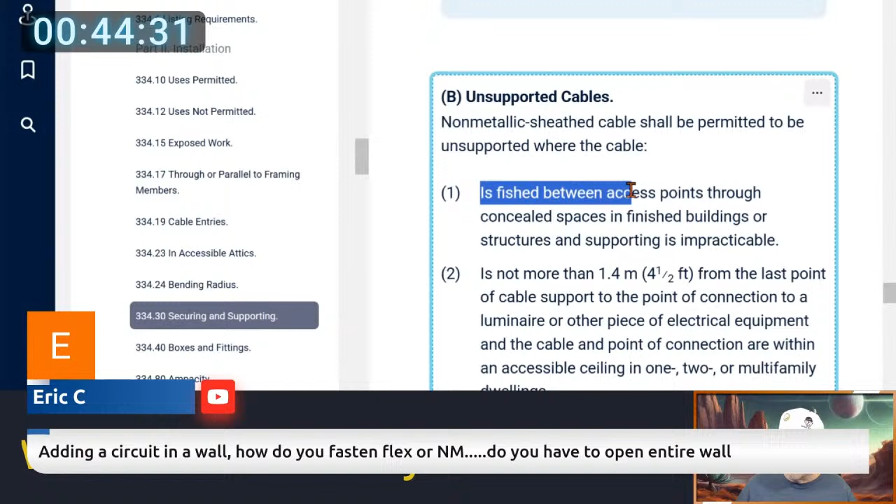Okay. So let's go in. So that's going to be under your 334.30, right? So it's the securing and supporting. So you've got all these rules. Then you've got this rule down here for unsupported cables. Here it says non-metallic sheathed cables shall be permitted to be unsupported where the cable is fished between access points through concealed spaces in finished buildings, not new buildings. Finished buildings. So you're coming back and adding a receptacle.

Let's say an example was you have one down low and you want to add it up high for a flat screen TV. Well, they make kits for that. You're not going to put cords in the wall. You're going to use cables. And this is a good example. And impracticable means it's not something that we're going to say, go ahead and rip the sheetrock open. That'd be pointless. That type of thing.

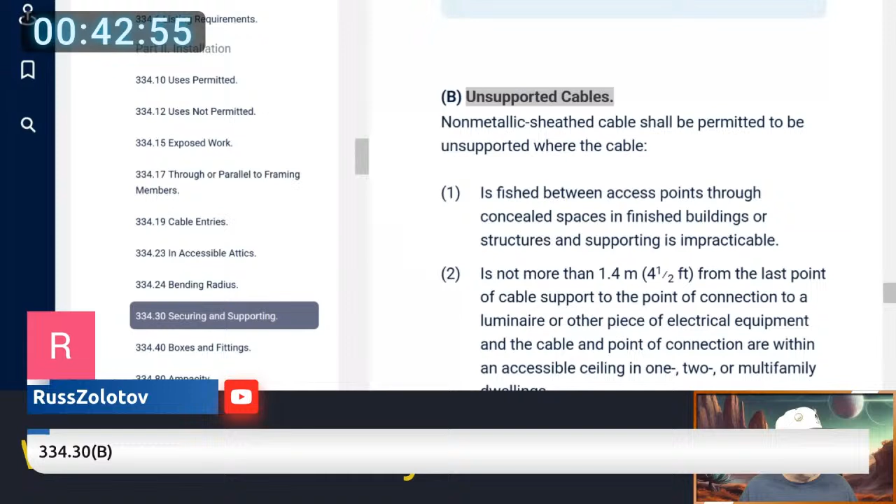Yeah, Anthony talks about IAEI crumbling. Yes, I believe you're right as well. And I think the first mistake they made was getting in bed with manufacturers like Eaton and the people that maybe work for Eaton. I think that was the first sign of crumble, which means that they have nothing in their own association to create things, so they have to pull from a source that probably didn't charge them anything. Anyway, there's a whole bunch of things wrong with IAEI. Now, do I still support their effort? Absolutely. But as an organization, in my opinion, I dropped my membership because I just don't see it. I'd rather support NFPA, even. So anyway, let's see here.

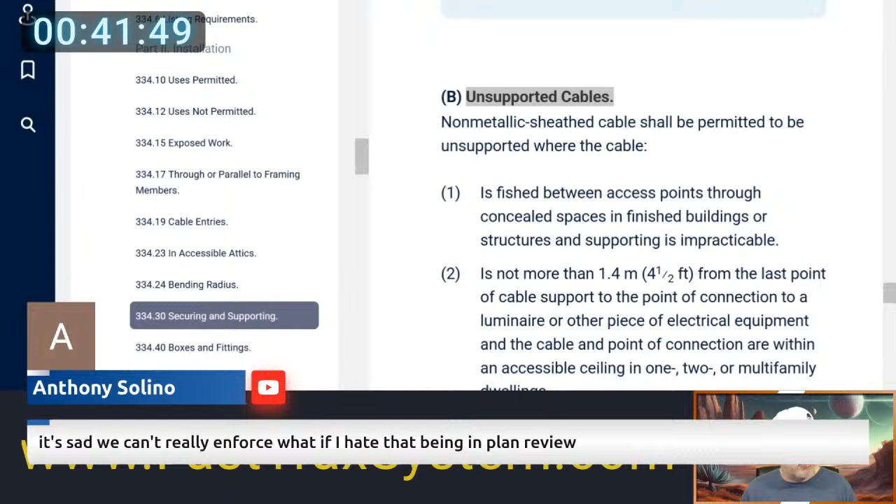So Anthony says it's sad we can't really enforce it. So in plan review, you're looking at it and they don't have to put a receptacle there. Okay. So let's go back real quick and look at the code, and then we'll break it down and I'll show you what the code says and how it changed, for those that are like, all right, how does this actually change?

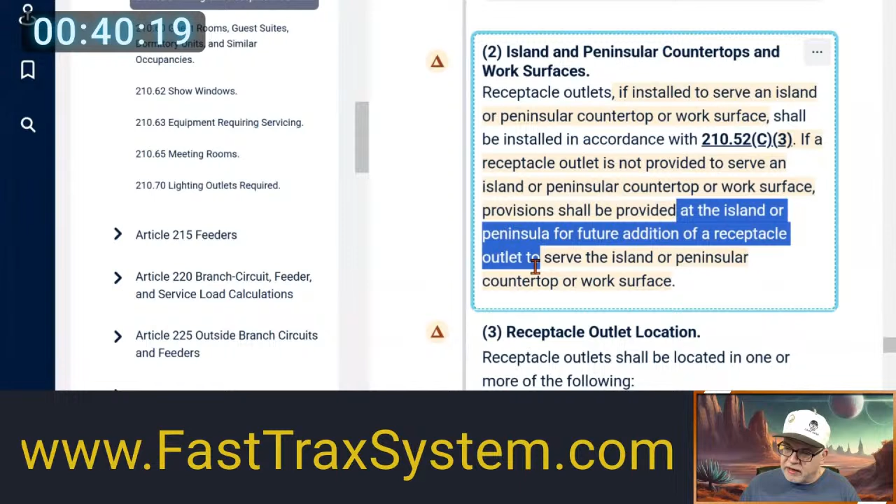So what it's saying is, look, if you don't put one, then you have to provide provisions there to do it, okay? If you do put one, then you have to follow the location rules, right? That's basically what it's saying. Now, when it talks about having a provision there, that could be you putting a junction box underneath there. That could be you putting a raceway from a location where you can get to the circuits, running the raceway over and a raceway up. That could be considered being able to add it in the future.

I would argue also that if you have an island and it's unfinished underneath it, or a crawl space and you could get access to it, you could get underneath and up into it, that could meet that provision. That is something you'll have to talk about with your AHJ to make a decision, okay? So that's something that y'all have to work out with your AHJ to see what they're okay with as far as having that future provision there. Now, as far as the location, let's say you are putting one, right? You choose to put one, okay?

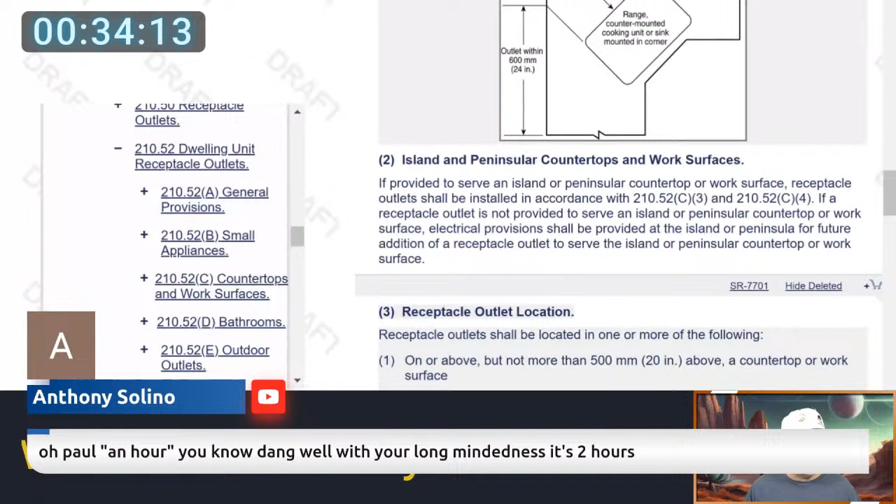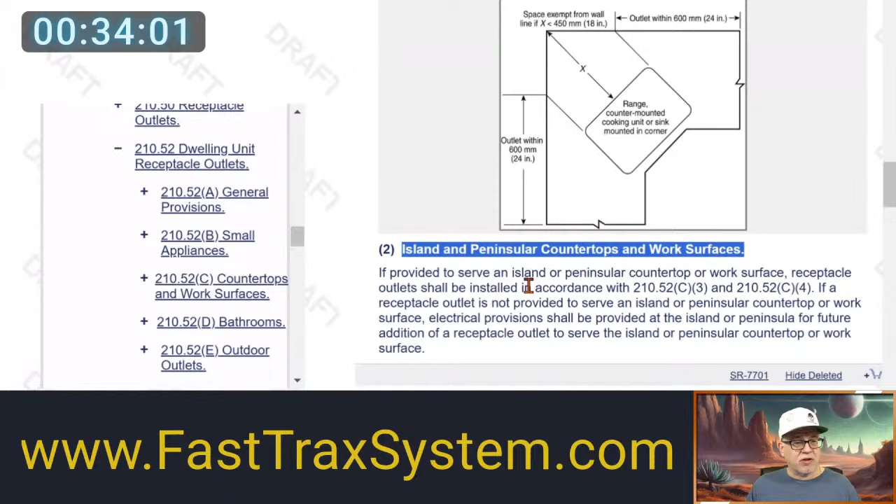All right, so that is the code requirement for the 2023 National Electrical Code. So the next thing that people look at is, okay, well, what's coming for the 2026? Is there going to be anything that helps this, anything that gives a little relaxation? Okay, so here is what is proposed for the 2026 currently. It says if provided to serve the island or peninsula, all this looks the same. Doesn't look like any key difference here.

Now let's look at the locations. It says receptacle outlet locations shall be located in one or more of the following: on or above, but not more than 20 inches above. Okay, that didn't change. In a countertop using receptacle outlet assemblies listed for use in countertops. In a work surface. Okay, that doesn't look like that has changed any. I'm just trying to see if anything enhanced anything. Okay, so that is the locations.

Now it seems to add something called receptacle outlet locations prohibited. Let me get rid of this deletion here; this is a little cleaner language. It says required and permitted receptacle outlets installed in a location that is accessible outside a cabinet or wall surfaces that are below the countertop or work surface shall comply with the following. Okay, so this right here seems to give the receptacle.

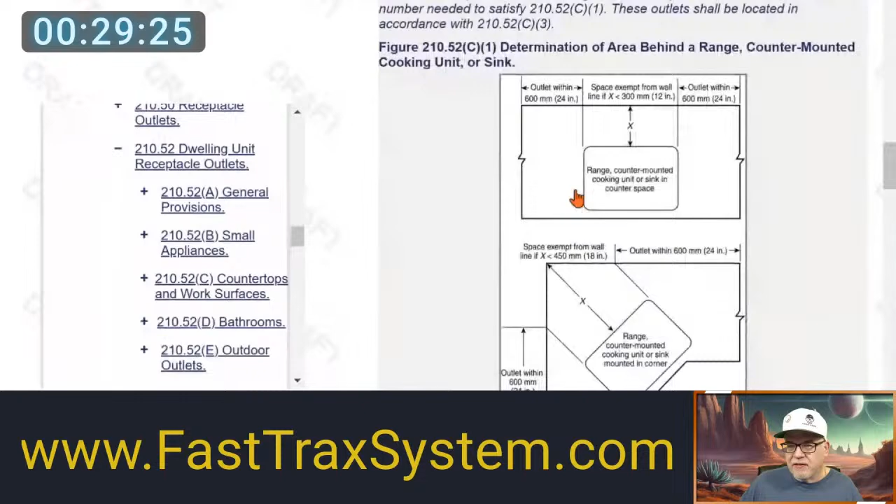Let's see here. I don't know if I can go back to the first draft report. Hold on. Let me go back real quick. I want to look at something in the first draft. Bear with me, guys. This is when it first got submitted. This is for 2026, for people coming in saying, what the hell is he talking about? I'm just trying to see if there was any language change.

And okay, so here, so then we have the locations that you can install it, right? And then it went on to say outlet locations prohibited. Okay, shall not be installed on cabinet. This is a very stupid structure. Somebody that submits a NITMAM for this has to clean this up. This is very stupid code language.

You start off by saying where the receptacle outlet can be, right? And you give all this information, and then you're going to give receptacle outlet locations prohibited. And then it's going to tell you that required and permitted receptacle outlets shall not be installed on cabinet sides or wall surfaces. Okay, but this is the locations where you can put it. And you have nothing in here that says that it can be on the side, right? Or below. Then you come down here and say, oh, well, you have locations that are prohibited.

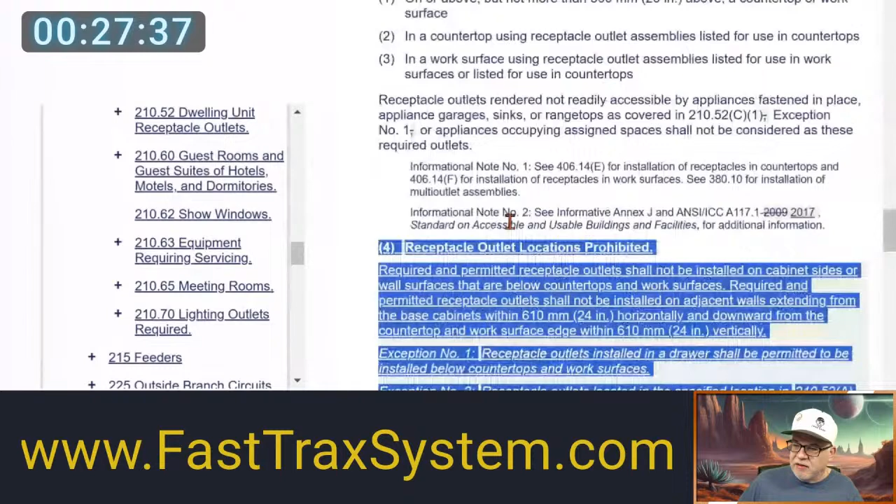It says required or permitted receptacle outlets shall not be installed on. So this is general, okay? Looks like this is just general to countertop spaces. It just looks like it has nothing to do with the island or peninsula. This one is referenced down here, and then this is also referenced. It's very stupid language. I'll have to look at it. I got to come up with a NITMAM, since this is really poor language.

Okay, so. That was what I was afraid of. I was afraid that I would go look at it, and I'm going to have to look at it deeper. I was afraid I'd go look at 2026 and really get discouraged in what the code panel's doing there, because it is. I don't like it. I don't like you tell me where I can put a receptacle outlet on or above, and then you have prohibited areas, and then you proceed to tell me what's prohibited, which is general. In a kitchen, let's say, because it looks very general.

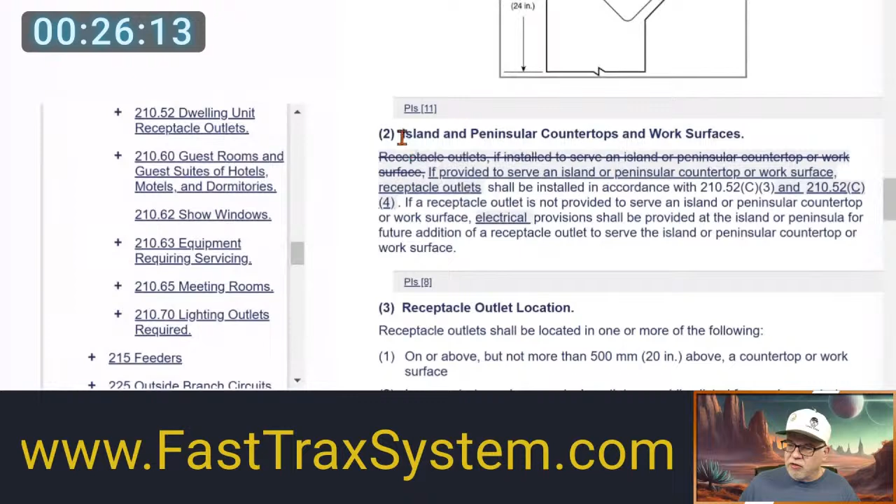And why I say it's general, by the way, let me take you back here real quick. Let me tell you why I say it's general. Because you have this requirement, which is subdivision 2, and then 3, and then 4. This is 2026, by the way. We're just looking at 2026 proposed. You have this wording here, and it makes reference here, and it says, shall be installed in accordance with this and this, okay? So this tells you where it has to be.

And this is telling you where it says required and permitted receptacle outlets shall not be installed on the cabinet sides or wall surfaces that are below countertops and work surfaces. Required and permitted receptacle outlets shall not be installed on adjacent walls, yada, yada, yada. Then it has an exception down here that gives no guidelines, for example, to not being below 12 inches, overhangs. So that tells me that it is not particularly germane to any of this. So it's just very muddy wording.

And so somebody can argue and say, but is this saying that I can put it on a drawer below the countertop? Okay, which here it says that the receptacle outlet location has to be where? On or above. Okay. And they're saying, well, down here, they're talking about prohibited locations. And it says the required and permitted receptacles shall not be installed on the cabinet sides, yada, yada, yada. And then proceeds to give me an exception that says receptacle outlets installed in a drawer shall be permitted to be installed below the countertop surfaces. But that's in the drawer.

Okay, so if I cut it into the face of the drawer, then it's allowing me to take a drawer and sacrifice it to cut a receptacle outlet in there, and then that would be permitted. Doesn't say anything about that drawer has to be fixed. It could be open. So if I have cables running through it, you're going to have this cable exposed in a drawer. It doesn't say that the drawer has to be fixed in place. It's just muddy as hell. I don't get it. The code panel 2 did no service there. Okay. Wow, that one is muddy as hell.

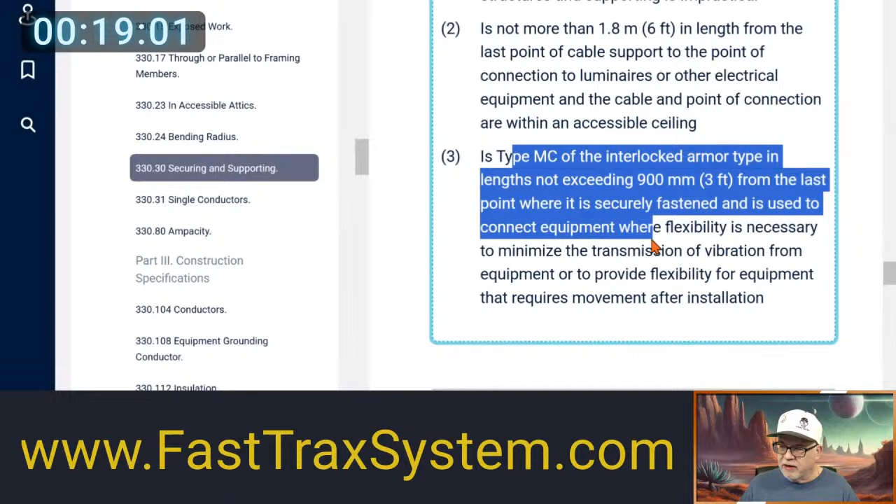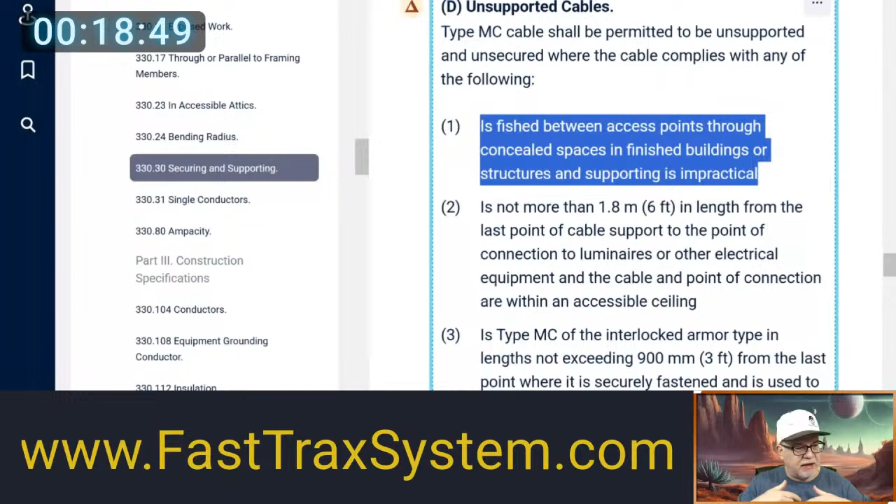So this is only in a situation, not in an open ceiling, not in an accessible ceiling. This is, again, where you might cut the finished wall and you fish something down to get from point A to point B. I don't see a distance length on it. I don't see anything in the code that demands distance length. That answers your question.

Russ with another one says, okay, I think this is tied to the other one. For example, 625 requires the EV charger to have 125% rating on the circuit, but 240.4 allows for the use. Yeah, it does allow for you to use the next size up, but that's for the overcurrent protection, right? You still cannot load a conductor more than its ampacity rating.

So we get a lot of rules where it tells us to go up to 125%, right? And even though you're in 625, it has its own rules, you still have other rules you have to follow. You still have rules in 210 you got to follow as the branch circuit. So I could have a conductor and I size it to 125%, and then I'm going to put it on an overcurrent protective device, unless something prohibits it in 625.41, which we can go look at.

If a conductor's good for, let's say, 18 amps, and you terminate it on a 20 amp overcurrent device, as long as the calculated load doesn't exceed the rating of the conductor, then essentially you're still protecting that conductor, okay? It's still fine, and that's the whole principle behind that. So we do that all the time.

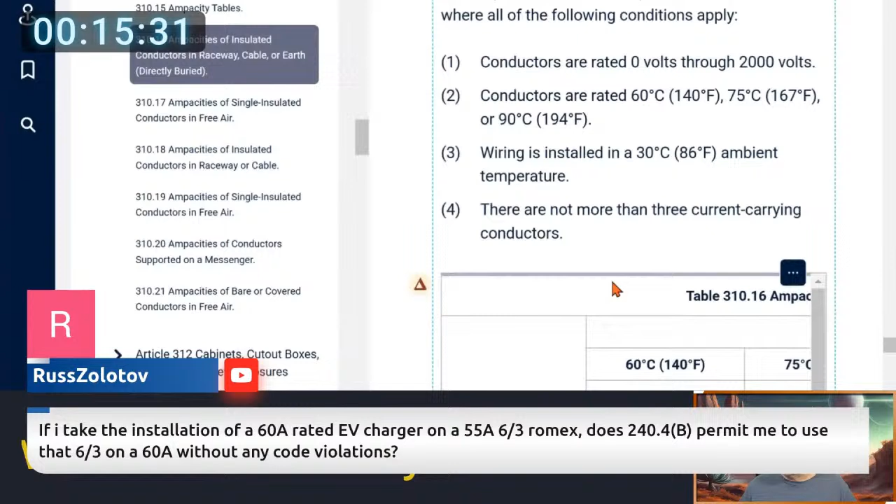So if we go to the NEC, here's the ampacity. I'll pop this table up. We can see the majority of it. We'll be over here, okay? And I'll pin this header. All right, so a 6 gauge is good for 55 amps, okay? So in that scenario, you're limited to 60, okay?

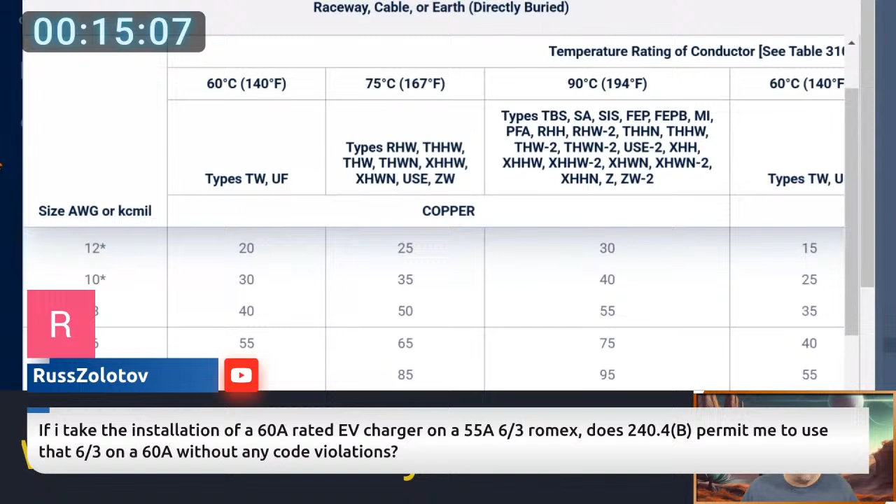So one of the problems we do for the adjustment and corrective purposes, and I got to get rid of this because it's in my face, there's an example where you can't exceed the ampacity of the conductor, right? And so in a scenario where, if the load is going to be less, then you could terminate it, although 334.80 tells us that you can never exceed the rating of the conductor to be protected. So you typically would not use a next size up rule for that.

But I'm trying to think of an example that I see. Let's see. I think the example I see is typically those EV chargers, level 2, are like 48 amps, right? That type of scenario. And also remind you that the other thing that comes into play is typically 240.4(B)(1) does not allow the next size up to be used on receptacle circuits, right? So this is an EV charger. Okay, you might say, okay, well, it's a single receptacle.

Well, one of the things that you're bound by is the manufacturer's instructions, what they tell you you have to do, right? But if we look at the scenario, you're painting a scenario that doesn't really exist, because what you typically have is a 48 amp level 2. It's an industry standard 48 amps. So you're doing a bait type question, Russ.

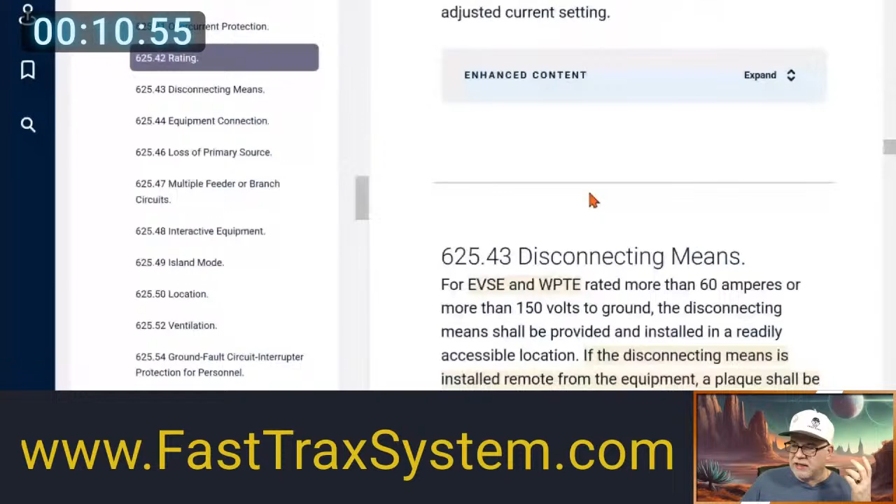So the overcurrent protection, and I think that's what your situation was, Russ, with your 60 amp EV, is typically 48 times 1.25, and that's where the 60 is. So you have the 60. Okay, now getting down into the rating. The EVSE shall have sufficient rating to supply the load served. And if you go down through all of these, unless you're going to be limiting the load, you're basing the circuit on the overcurrent protection, and we have to protect the conductor at its ampacity, right? Well, we're told what?

For example, if you look at the example up here for the EV branch circuit, it says each outlet installed for the purpose of supplying EVSE greater than 16 amperes shall be supplied by an individual branch circuit. All right. And as you can see now, we have to do the overcurrent protective device at what?

125% of the rating, which is why we got to the 60. Okay. All right. So we typically take these EVs as a continuous load, right? So we're going to take whatever it is at 48, and the manufacturer tells you this too. Take that at 125%, and that means that I have to have a conductor that's good for what? 60 amps, because I took it at 125%.

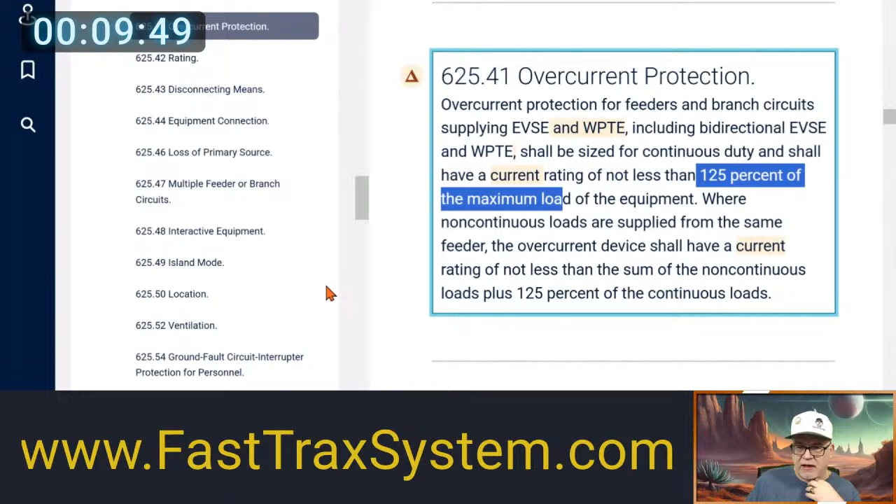Well, that's why you can't use the NM cable at the rating you were looking at. If we go back to conductor sizes, this is why, and I'll pull this up here. This is why we can't use, in this scenario, 6. Now, can we use it if everything is rated for what? Okay, now, do we have any adjustment or corrections to take place? If you have some adjustment and corrections to take place, remember that 60, even at the 60, is still 55 amps, which is the actual load.

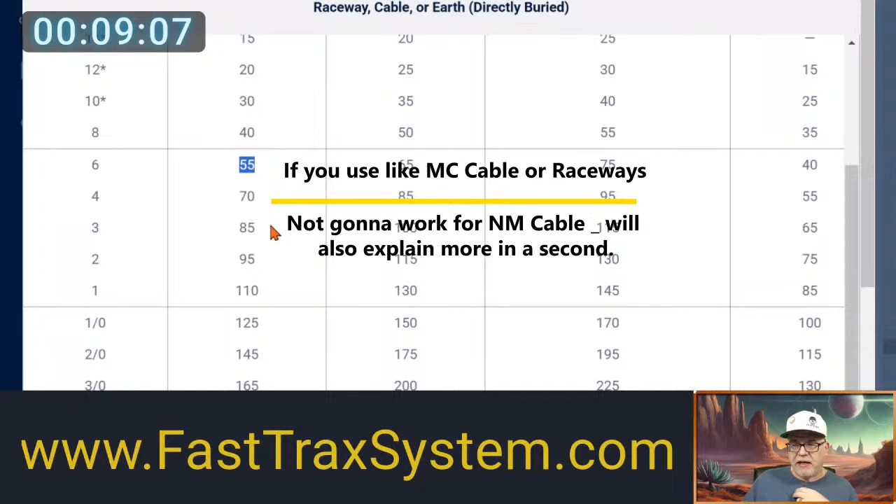So is it a possibility if you have any adjustment or corrections that have to take place, then you would be adjusting from the 90, right? And as long as the actual load doesn't exceed that of the 60, then you can get away with the 6 gauge. Does that make sense? So if you look at 334 and you have to do some adjustment or correction purposes, and I'll assume that in your case you are.

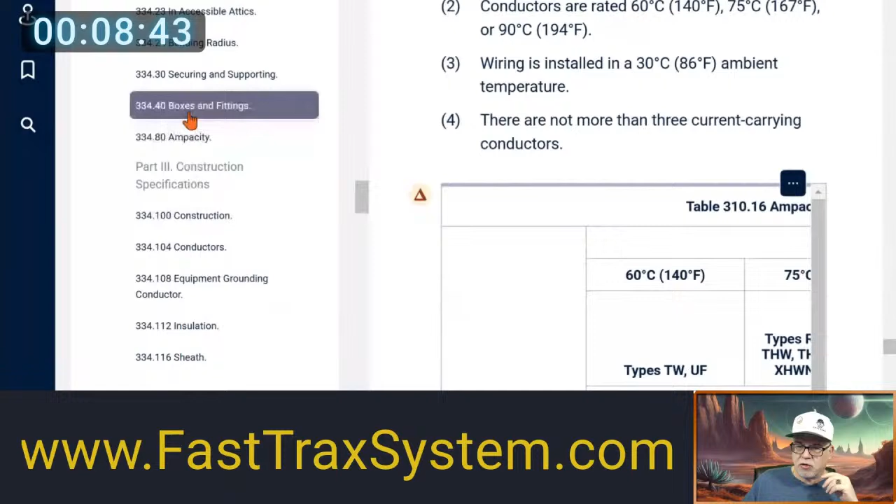And if you look right here, it says, okay, the ampacity of NM cable shall be determined in accordance with 310.14. The ampacity shall not exceed that of the 60 rating, okay? The 90-degree rating shall be permitted to be used for adjustment and corrections, provided that the final calculated ampacity does not exceed that of the 60. So that's not really using the next size up rule. That's just using the allowances here.

So in this case, are you making an adjustment or correction? Because the actual load is 48 amps. But if you do it at 125% for continuous load, then that's going to put you up into the 60. And of course, in that case, we're just using NM, and there's probably not going to be any adjustment or correction to take place. So you're going to end up protecting that conductor at the ampacity that you calculate when you're sizing it, at 125%. So that's where you size your conductor. And then, of course, that's going to be okay because it's going to be on a 60.

But the irony is, if you do have some adjustment and corrections that take place, then you might be able to play around with it and see what you can do. I don't know if that answers your question, Russ, but again, most people run into this question with the non-metallic sheath cable. And the biggest one that I get from these folks is they want to run, let's get back to the ampacity real quick. They want to run this. Or they want to run an 8-3. And the problem with the 8-3 is because of this, okay?

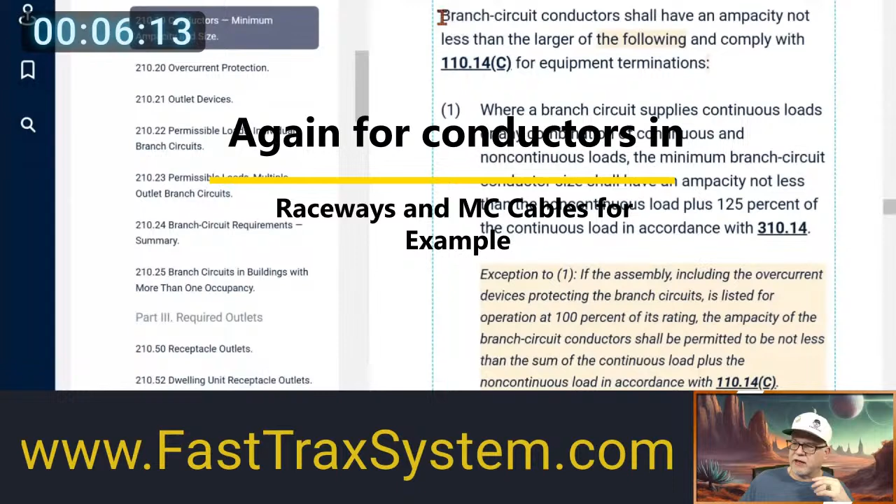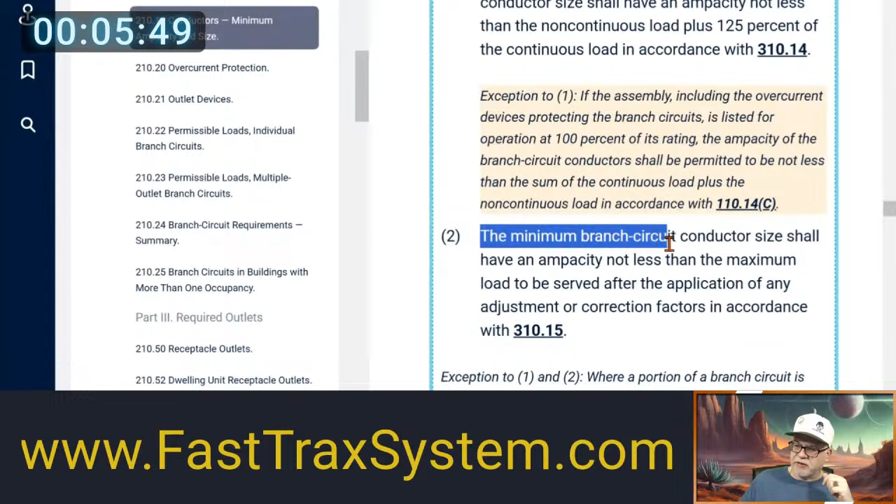So here's the rules that we were talking about for branch circuit, because that is a branch circuit. It says where the branch circuit supplies continuous loads or any combination of continuous and non-continuous loads, the minimum branch circuit conductor size shall have an ampacity not less than the non-continuous load plus 125% of the continuous load. Okay. And then, of course, the minimum size branch circuit conductor shall have an ampacity not less than the maximum load to be served after the application of any adjustment or correction. So you could have a situation where you have an adjustment or correction that takes place, and then you only have to size the conductor what?

It's based on the actual load, which is continuous load, but it's the actual load. Like the 48 amps is the actual continuous load. We're just following the rules and sizing it at 125% and then picking a conductor. And then also in 210.20, it's the same scenario for the overcurrent device, right? Same scenario, continuous and non-continuous loads.

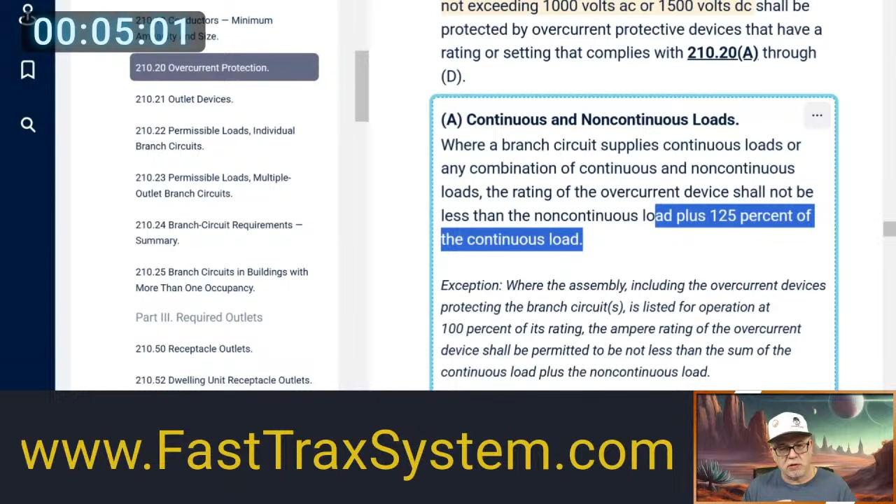So if the manufacturer already dictates that it's to be treated as a continuous load, then you do it. The question is, is that a continuous load or not? And that becomes the question, and this is the 2023, by the way: is that a continuous load? Is it going to be pulling its maximum output for 3 hours or more? Or does the NEC tell you to treat that as a continuous load? So that's the type of scenario you want.

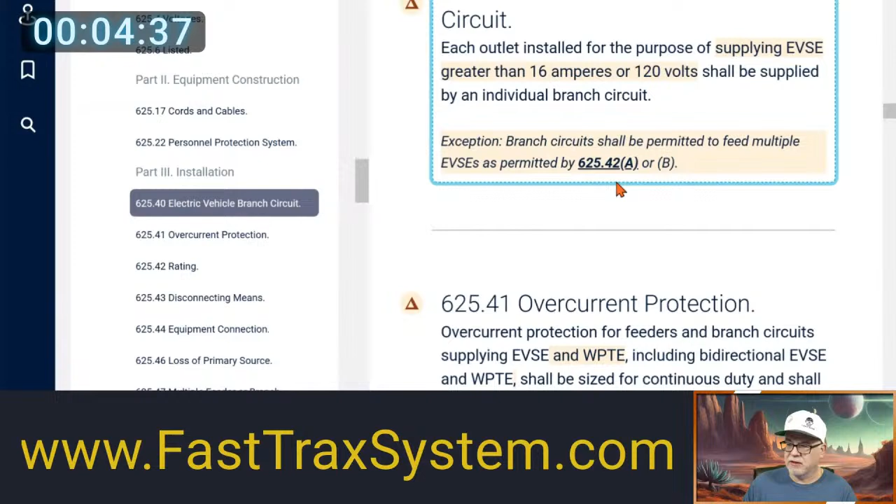And if you read down here, it's telling you the overcurrent device for feeders and branch circuits shall be sized for continuous duty and shall have a current rating not less than 125% of the maximum load to be served. So at the end of the day, that's typically why a manufacturer will dictate the sizes. Does that make sense? Just picking on you, Russ.

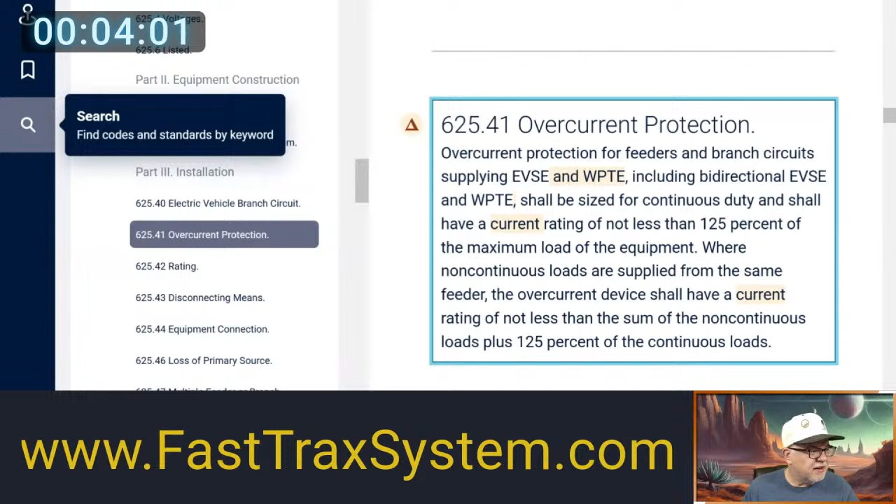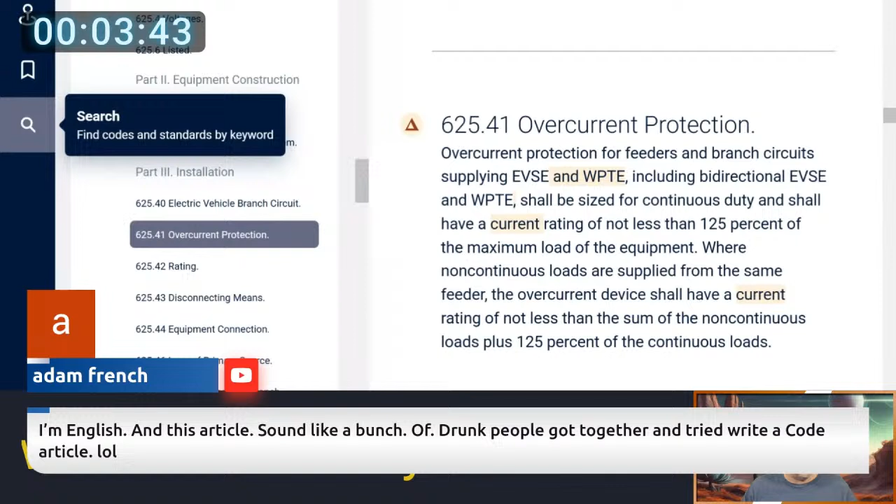What else we got here? Let's see. Adam says, I'm English, and this article sounds like a bunch of drunk people. Are you talking about the 625? Or you're probably talking about the receptacle for the island. Yeah, it is a bit gibberish.

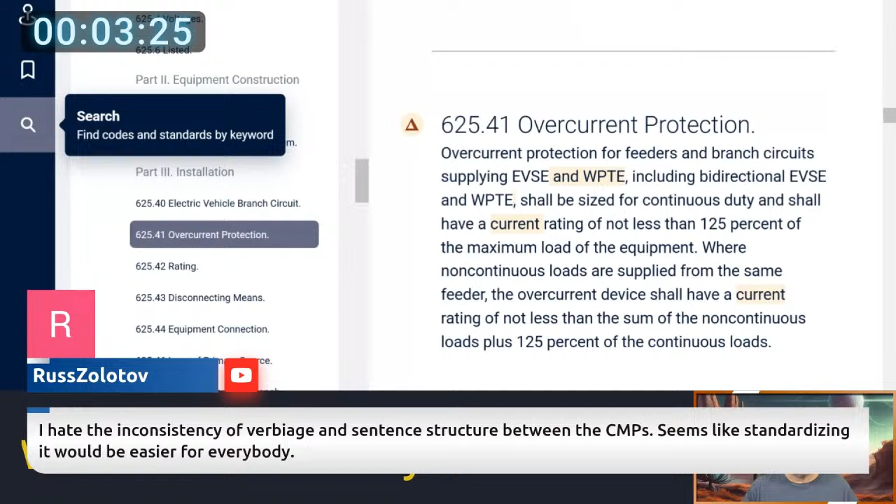Russ says, I hate inconsistency in verbiage and sentence structure between CMPs. Yeah, it kind of changes. The only thing I can say is that you can submit public inputs and public comments to try to get things changed. I will tell you that in the 2029, they're not going to change the code language, but the structure is supposed to be a little bit better.

Hold on a second. Let me type this in here for you. There we go. I was trying to see if I had something I could bring up that might have explained something a little more. I had a really good article I was going to share in the chat, but I can't find it.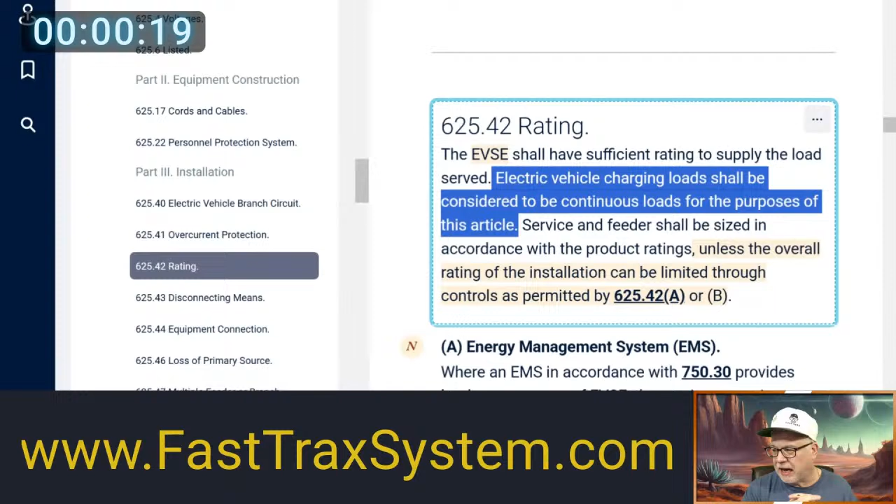But that's what causes the problem: we're forced to size these circuits as continuous loads. So in your case, Russ, the NM is good for 55 amps, but we're required to take that 48 amps that is the continuous load, probably on the nameplate, at 125%, and that's 60. So I need a conductor good for 60, terminated on a 60 amp overcurrent device. The problem everybody falls into with this NM, and I'm okay with people running NM, we make NM.

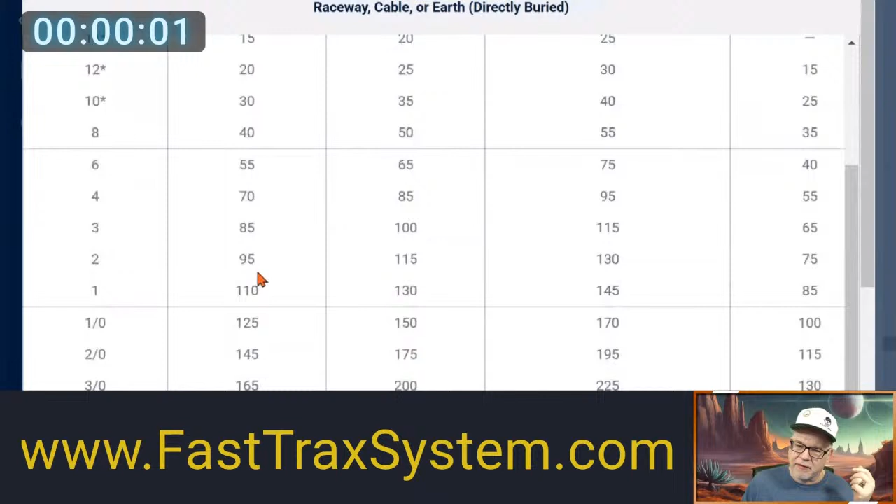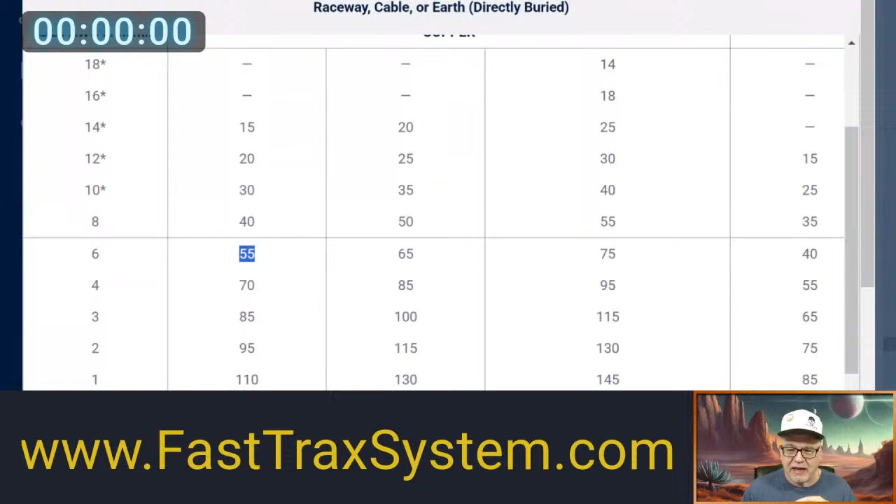I think the problem is when they go to the ampacity tables, like here, they get pigeonholed into the fact that this conductor is only good for 55 amps under the 60. And I was told to treat it as a continuous load. If it's 48 amps, I do 48 times 125%, so I need a conductor that's good for 60 amps. And this is where they get screwed. They want to use this column. I get it.

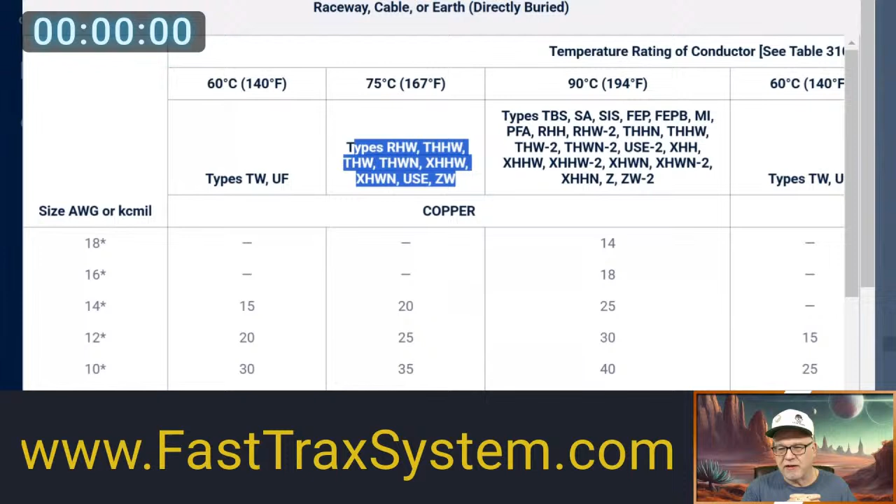But at the end of the day, you can't, because 334.80 is going to tell you that you can't exceed the values of the 60, even though you can do an adjustment and correction. And we can play with all those numbers at the end of the day. But it typically is protecting a conductor at its ampacity.

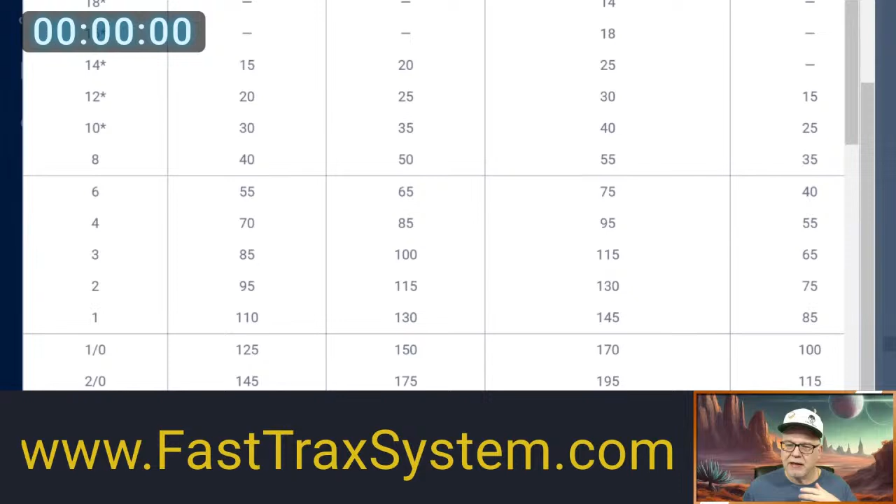Now, the argument is, okay, you say it's 55 amps, right? That's what the conductor's rated for. If you did the load calculation and the amps you need doesn't correspond, then you're able to go to the next standard size, right? Well, this one is rated for 55 amps. And if I go look at, I love these discussions. If I go to look at

If I do an adjustment to a conductor's ampacity and it comes back at 56 amps now, well, there isn't a breaker rated for 56 amps. So then I'm able to go to the next standard size overcurrent protective device. It's not like I can say, oh, let me go to 55, and then I can protect it at 60 in that scenario. Basically, when we use that rule, we've done a calculation and it doesn't correspond, right?

So in our case, there is a 60 amp overcurrent protective device, and I'm required to take that load at 125%. I'm just talking about your EV example. I'm required to take that load at 125%. Then I couldn't even be in the 55 on column C. I couldn't just say, oh, why can't I use that? No, because I've been forced in EV to do it at 125%.

And that's the same thing I've been forced for the overcurrent device. Both of them equal 60. So I have to have a conductor that's good for what? 60. You get me? Does that make sense? So now if I did a calculation on a conductor, and the ampacity comes back and it doesn't correspond, and I got to have a conductor.

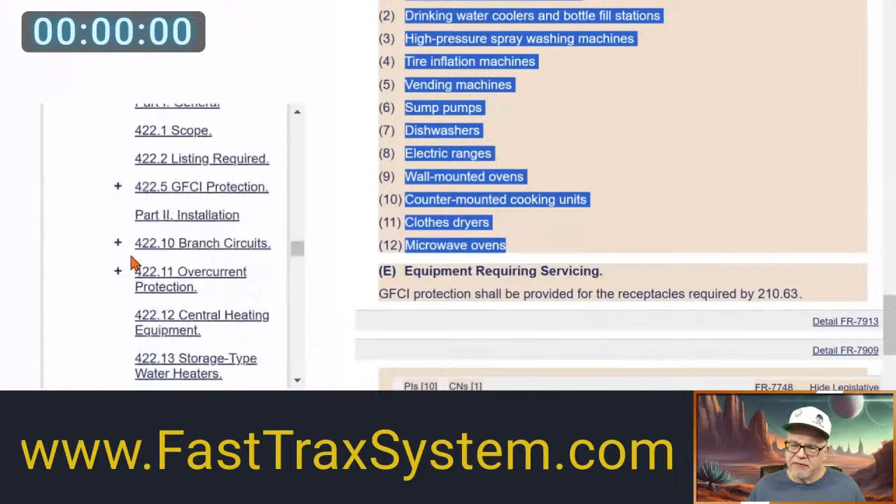And if that's the case, here you see what we did under Code Panel 17. Notice that we didn't add those other items. So Code Panel 17 didn't follow what they did in Code Panel 2. I believe Code Panel 2 is going to relinquish, because these are about the appliances, and it really has no reason to be in 210.8. If GFCI is required, it really should be up here in 422, which is appliances. So if they relinquish, I believe we just did a ballot vote last week, and we're not going to include those items.

Now, if there's a real concern about these appliances and GFCI protection, and some people argued that it was a real concern, and they didn't worry about the compatibility issue. The problem is that there are still people having issues with ranges and ovens and all kinds of stuff. No different than the issues we had when it was required for the air conditioning units outside. Same issues, and we had to have that delay, and they delayed it even more. That leakage current, same issue.

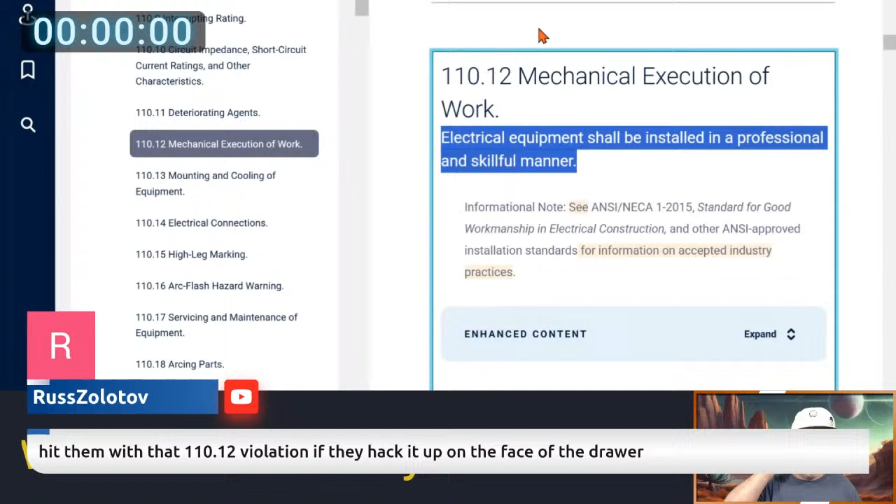Let's see here. Execution of workmanship. Only going to apply to electrical equipment, Russ. So I would like to throw that one at them, but here it says mechanical execution of work, electrical equipment shall be installed in a professional. All right. So I don't know if the drawer being hacked up will give them anything. That's that one where it's hard to enforce, right?

And it changed the language, by the way. Workmanlike manner, you notice that's gone, right? It says installed in a professional and skillful manner. But yet down in the reference for the informational note, it all comes from the good workmanship standard. So again, we removed the workmanship in here, but still reference the NECA document, NECA 1, which is not enforceable. It's just an informational note. So it's hard to pull that 110.12 one on people.

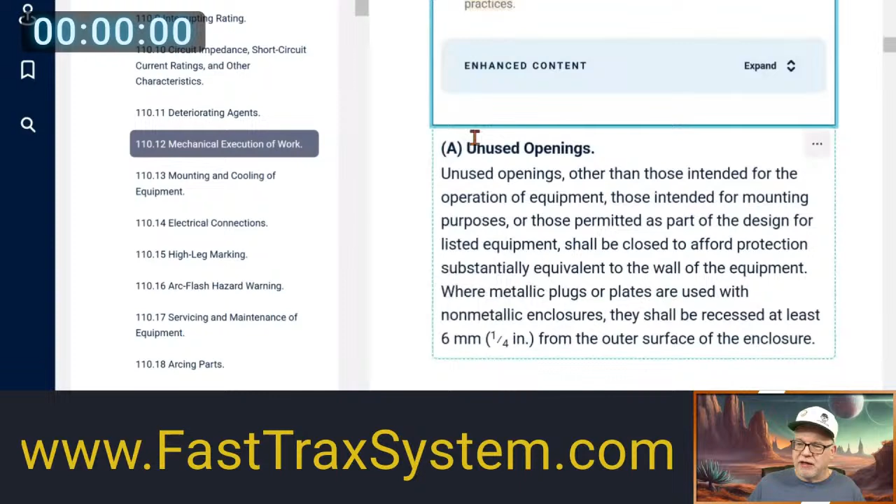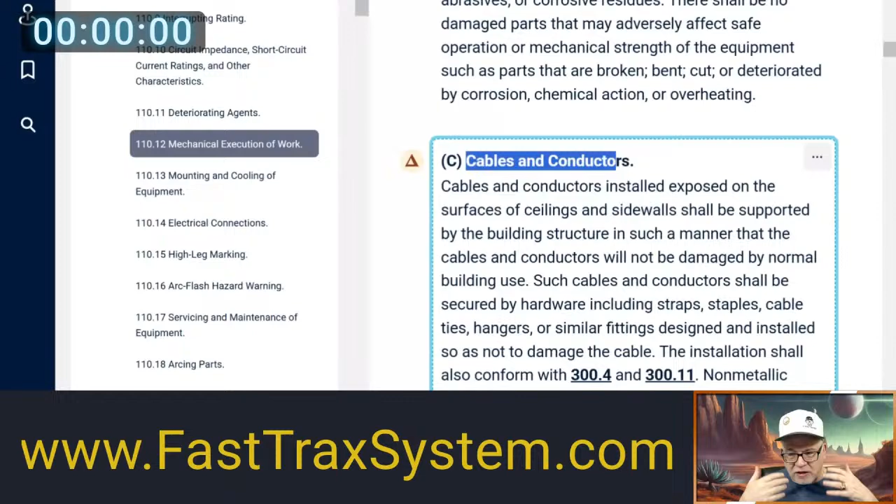Now, these are easier for unused openings. Integrity means beating the hell out of the wire or cutting the wire up or damaging something during the installation, or plaster or paint that can inhibit the use of a product, like if they spray all over the breaker, the bus and all this. And then we have the cables or conductors. Obviously, they have to install in such a manner that won't damage them. Bending the MC too tight. We have bending radius requirements that we have to follow, but still, this gives you another one that you can cite for that.

But yeah, about the drawer, I don't know. I would think that if they beat the drawer to hell, the homeowner is probably going to step in and say, dude, really? I'm paying how much for this house? Yeah, and they're not going to let the builder off the hook. I'm sure on that one.

So anyway, hopefully everybody enjoyed coffee hour. We talked about a lot of things. If I had to summarize, obviously in the 2023, you cannot have a receptacle outlet below the island or peninsula countertop. It has to be on or above, not more than 20 inches. You've got to have a provision there for the future. Whether it's a box, fine. Whether it's a raceway leading over, fine. Whether you can get to it from underneath, it could be argued that's fine, as long as the circuit is down there and they can get up there.

Can't be the panel upstairs, unfinished downstairs, and then the island. Then they're going to argue you're not putting a provision because now you've got to get it from the panel down and over. Well, we could do that anytime. So I don't know that one's going to fly. But if you take the circuit down and put it in a junction box under the floor, unfinished basement, crawl space, maybe that meets it. You can drill right up and put it in. Or maybe you just run the circuit over there and put it in a junction box. That might meet it.